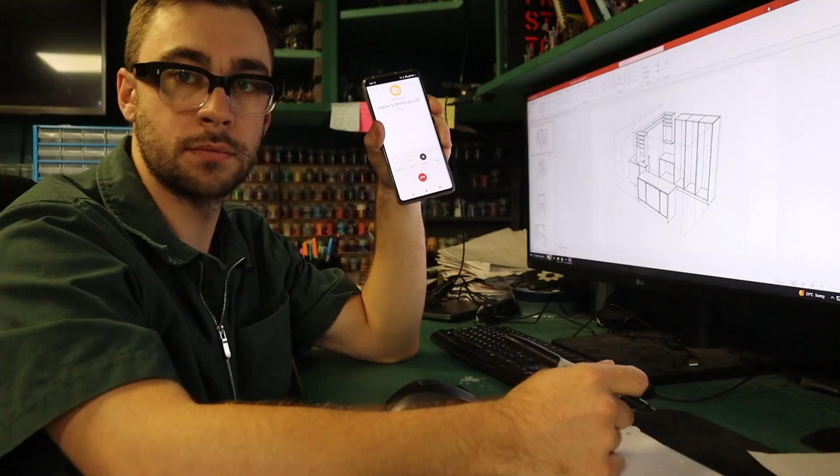Good afternoon, Systems. How's it going? I wonder if you could give me some prices for some materials? Yeah, is it a long list, mate, or is it just a few? Just a few items. I'm wondering the price for 18mm plywood, cabinet grade? It's about 172.78 plus your VAT per sheet. 172 plus VAT per sheet. Yeah. Okay. I'm on hold.

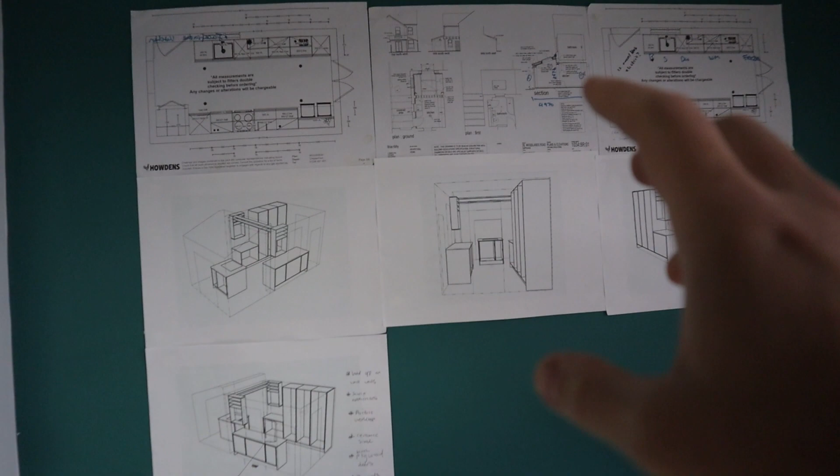Worktop prices. I'm in the process of designing a kitchen at the moment for a client. These are the plans. This is the design right here. And now I have to figure out how much all of this is going to cost. So let's find out. I have already called up and got the prices. Look how expensive birch plywood is right now. 172 plus VAT. That's lunacy.

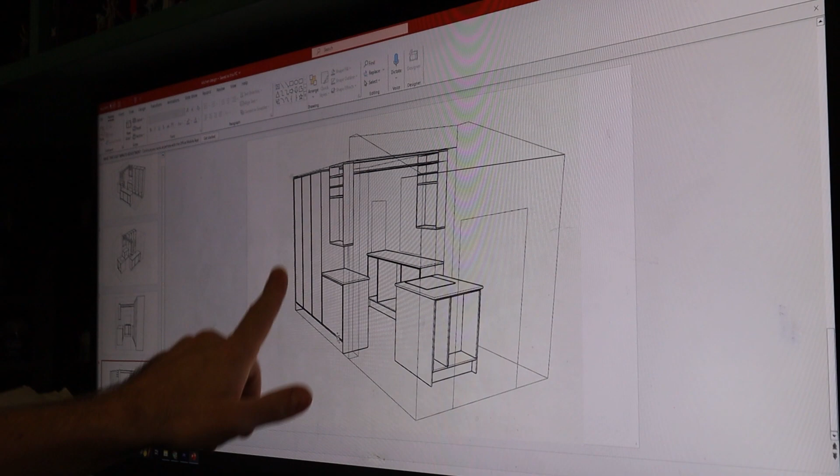The first job is to figure out how many sheets of plywood this is to make. Step 1 is to convert all of these separate cabinets into 18mm birch plywood sheets. I like to write down all of the cabinets that I have first. In this design we have 3 cabinets that are 600 by 600 by 2.4 meter. We have 3 of these.

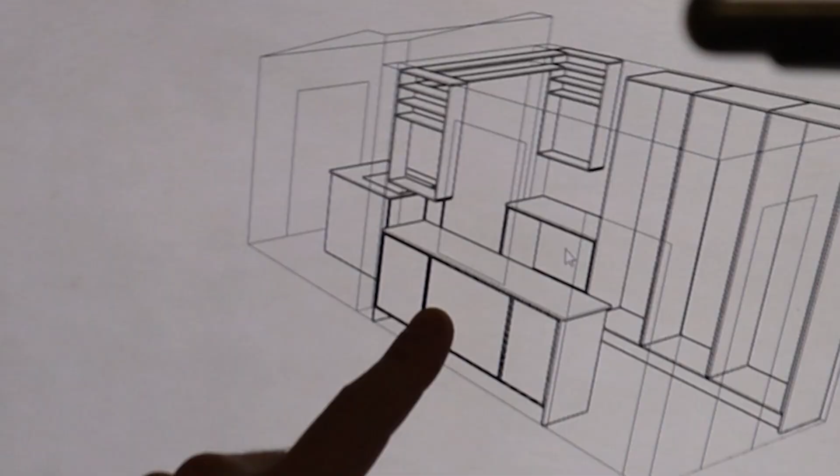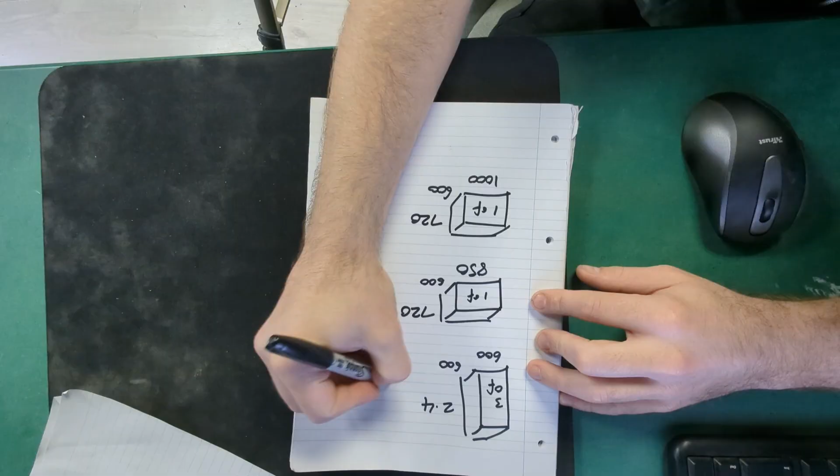Next we have the sink unit, which is this one right here. That unit is 850 by 600 by 720. Just keep going through that whole process until you have all of your cabinets sketched out. Now we have 7 cabinets. Now we have to divide these up into the individual components.

Starting with these tall units, we have 600 by 600 for the base. And I like to draw everything out so that I've got it all clearly labelled in front of me. And I know that I've got 1, 2, 3, 4, 5, 6 of these. Next we have the sides of these tall cabinets, and those are going to be 600 by 2400. And then just keep going through until you've got all of the components for the tops, sides and bottoms for all of the cabinets.

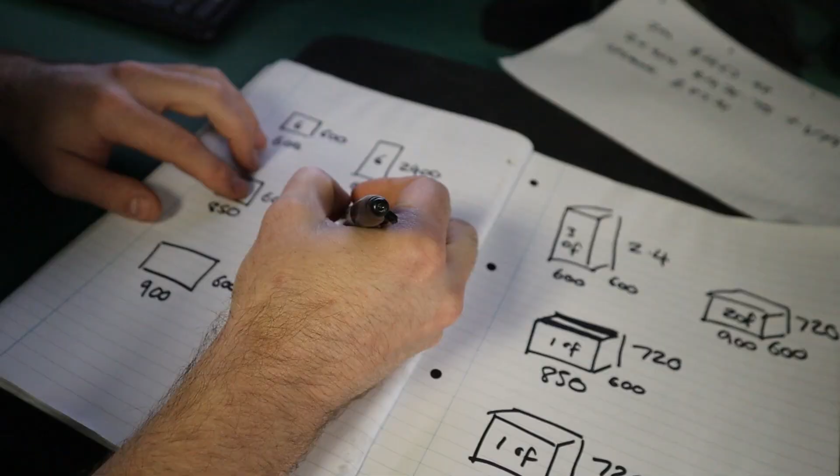Next we have to add up all of the backs and all of the doors. I like to do the backs and the doors at the same time because they're the same profile on the cabinet on each side. In this case we're using plywood for both the doors and the backs. Now that we've got all of our sheets, we can put these into a free calculator online. I use a free piece of software online. This is called Cutlist Optimizer.

And all I have to do is input each of these sheets into this table. Just to show you what I've done, I take 600 by 600 and I need 6 of those. And I've input it to this table, 600, 600, 6 of those. I've done the same for all of these other pieces. So for example, 600 by 2400 is right here, 600, 2400, 10 of those, and I go through the whole sheet and I implement all of that into this table.

Next I need to tell this calculator how big my sheets of wood are. All sheets are standard sizes. They come in 2440 by 1220. That's a full 8 foot by 4 foot piece of wood. As for the quantity, it wants to know how much wood I have, but because I'm ordering the wood, I want it to tell me how much wood I need. That means that I just need to put in a random number that I know is going to be more. So for example 99. Then we hit calculate and let it do its thing.

And you can see here it generates a cut list. The calculations are finished. I need 10 sheets of plywood to make all of these pieces right here. One thing I haven't included for is the end panels, kickboards and shelves. So in this case I'm going to add 4 more sheets of plywood to the total. I know from experience that will be enough to add all of the extra pieces and give me some scraps left over just in case I need them.

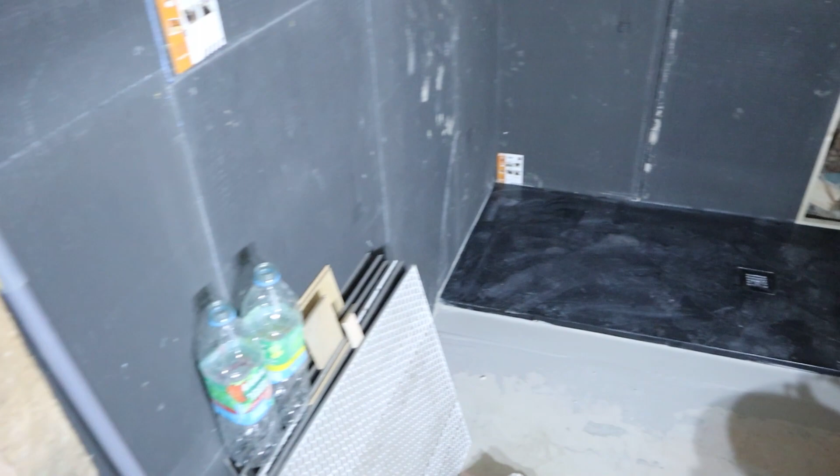Look at all of this mess, all of this stuff. It's really hard when you're working in a small space because every time you need to work somewhere, you've got to move everything else out of the way. And so it feels like you're constantly shifting a giant pile of rubbish around all of the time. It's actually not too bad in the bathroom, but out here it's a disaster.

And then this is our kitchen right now. I'm not too worried about looking after the floor because this is all going to get ripped up when we do the kitchen. This is our kitchen, and we had Wren come and quote this kitchen to be replaced. Pretty much the same as what we've got right here, like a galley style kitchen, but they wanted £24,000 to replace this kitchen. And you have to wonder why.

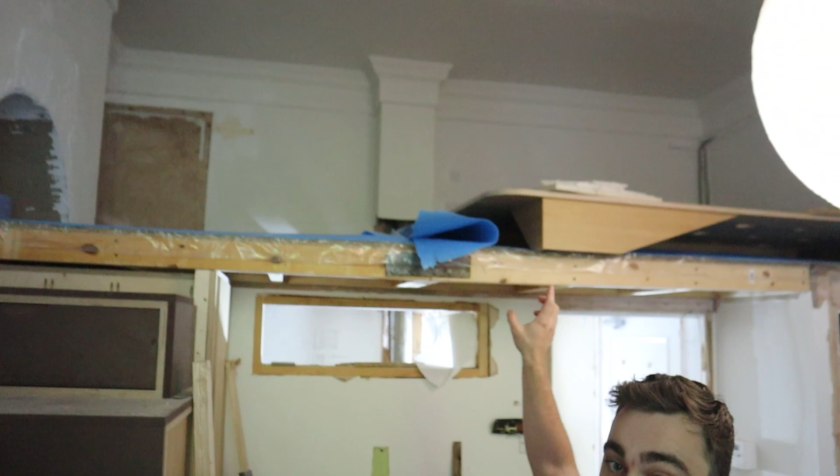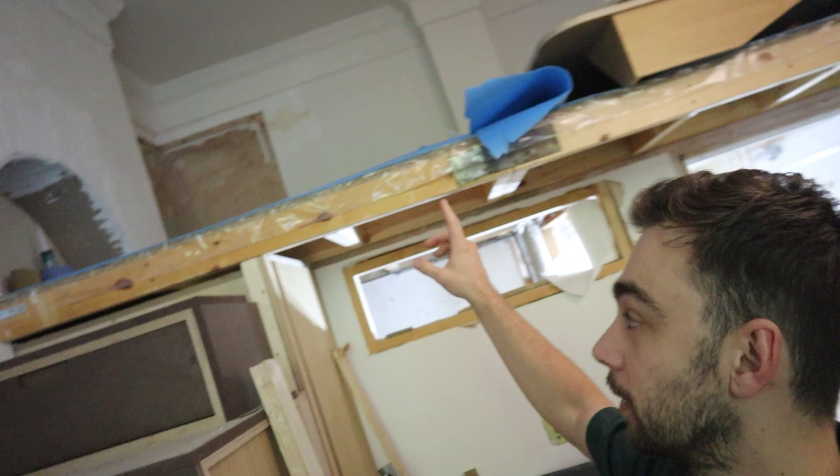So I think the plan is to put all of this stuff down here into the kitchen, and then I got to get this bed that's up here, that's got to go down into this living room space, because all of this flooring right here has been taken up from the bedroom. So I can relay the flooring in the bedroom, then the bed can go back up again, and then all of this junk, which will be in that kitchen, will come back into the living room.

And I feel like I'm just constantly, forever, just moving piles of stuff around when I try to work. It's infuriating. Do you like my selfie stick, Maya? A bit bulky.

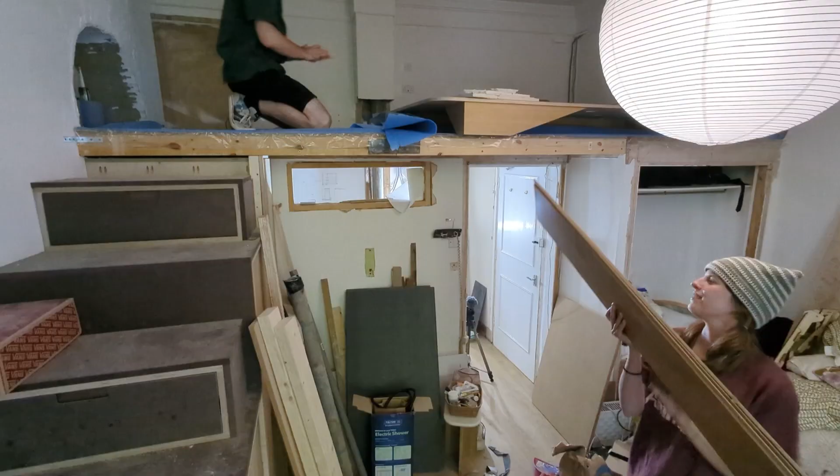Isn't that just so much better? How much room we have to work now. And in theory, these guys right here are going to flop straight down onto this bathroom floor right here.

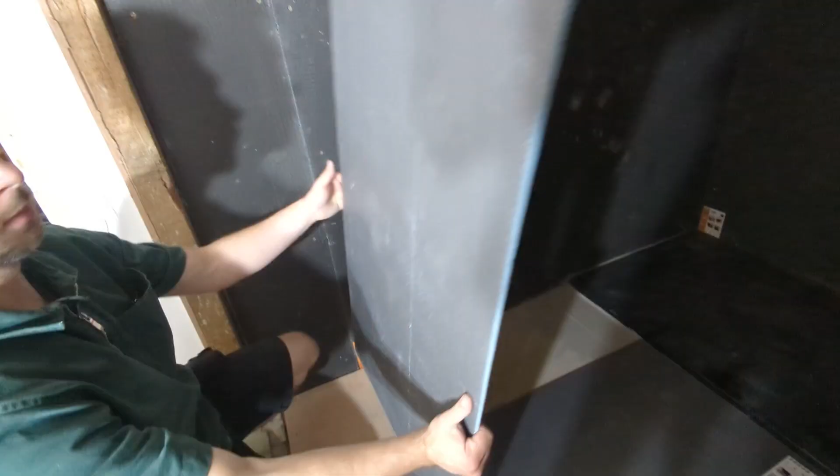Now we're going to evolve this into a date night, I think. I'm going to go find some dinner. Yeah. Yum yum.

It's the graduation, so everyone's getting ready to throw their hats in the air. So this is the graduation for University of Bath, which is like the really posh university in Bath. But the one that me and Maya went to, which is Bath Spa University, we kind of went to the cheap knockoff version of the university. Yeah, might as well have been a polytechnic.

This bar is cool because you can sit on the balcony and you get this view of Southgate, or if you face the other way, whoa, then you can see the trains coming in.

So we just finished our date at Ludo. It's first time there for us. We went there when it was, what was it before? Grays. Yeah. And it was good then too. But I give it 2 thumbs up. What do you think? 2. Would go again. It's good.

Right, is that the end of the video? Might be. We've got to go back now. Maya's taking the car. She's going to leave me at the office. I'm going to drive home in the truck. I've got a bit of editing to do.